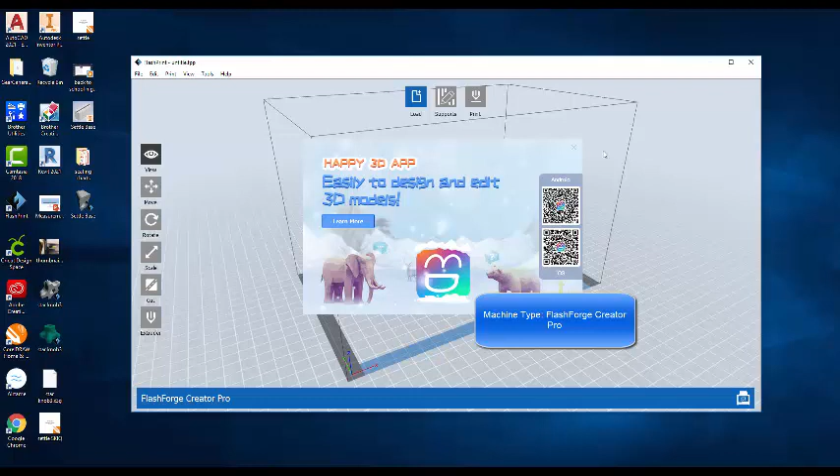Okay, now that you saved this as an STL, on your desktop you should see a program called FlashPrint. This is what runs our printers. You're gonna get a bunch of pop-up kind of ads here. You can close this. Don't download the new version. Just hit no on this. Maximize this if you want.

So I'm gonna go first to load, and I'm gonna grab the STL. This only brings in STL, so don't skip that step at the end. So I'll hit open on that. I'm going to hit yes to put it on the platform. It's probably not going to be oriented correctly when you first come in. You want this hole to be on the bottom.

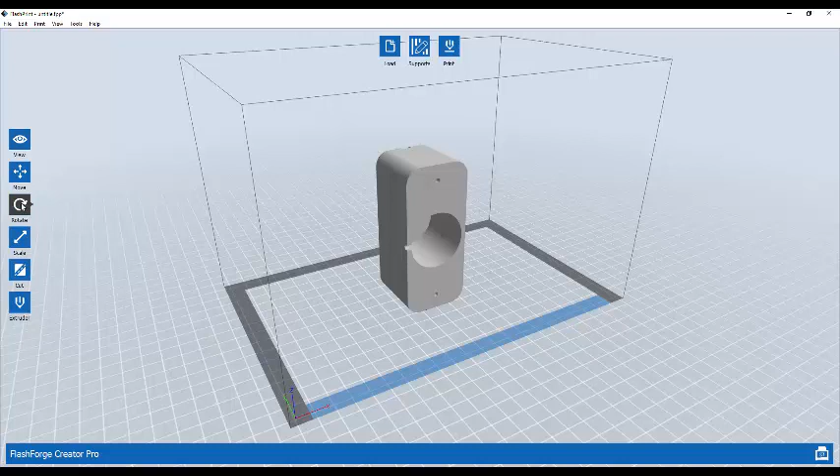So I'm going to go to the rotate tool over here, click on it twice sometimes. It says nothing selected, so I'm going to go grab my model. And then I'm going to rotate that around until I'm happy with the orientation. So right now the hole's on the bottom, but it's sitting up in the air. So I'm going to click over on the Move tab, and I'm going to say On Platform and Centered.

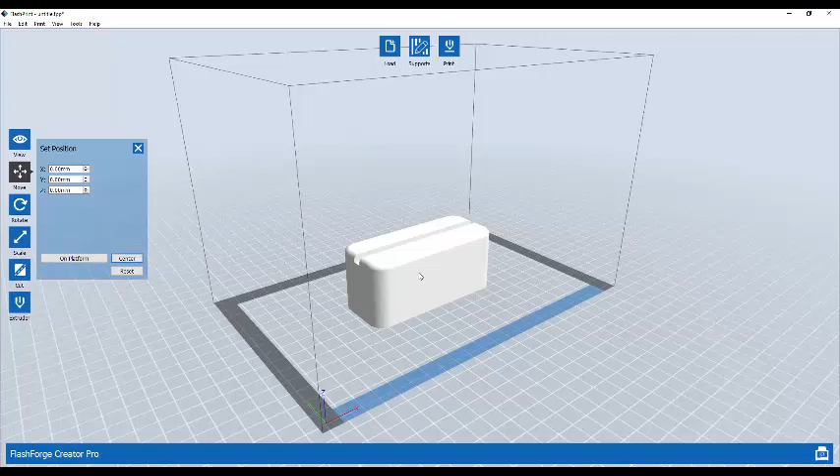If you're printing two of these together, so if you're working with a partner, you can bring in multiple models. If you want two of these, you can actually copy paste these within the model. Talk to me about that individually.

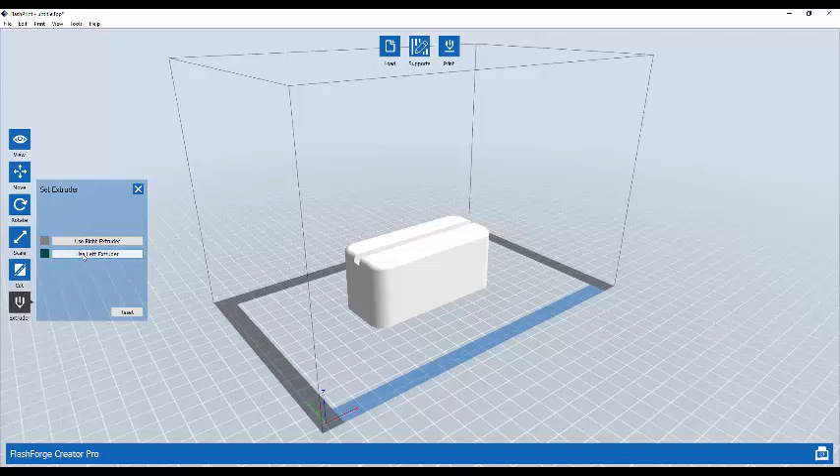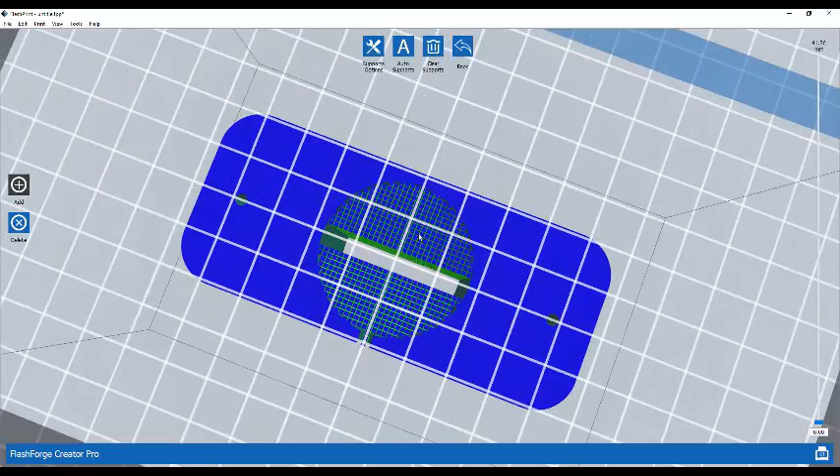From here I need some supports, so I'm going to go over to supports, and I'm going to go to support options. Tree-like is the default. You're going to select linear, hit OK, and then you're going to do auto supports. Auto supports is going to add in supports underneath so that it does not fall apart when it tries to print on top of the hole. Notice there are no supports inside of the small holes because we used the 60-degree point, and it can support itself through that. Now I'm going to hit back.

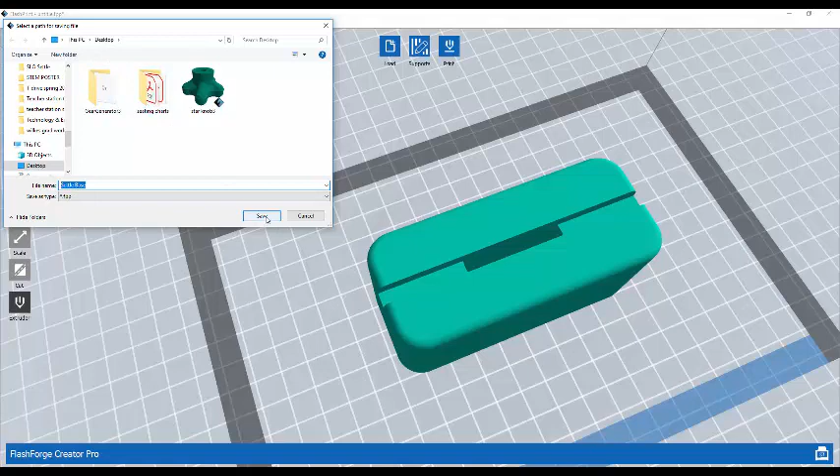It's going to say save supports. I'm going to hit yes. It wants to make a FlashPrint file, an FPP, and that's going to go the same place your STL is saved. Mine's on my desktop, so I'm going to start to clutter up my desktop, but for this activity I'm going to do that. You should probably be saving in OneDrive. And this is ready to print at this point, so everything looks good.

I'm going to go into my print menu, and there's not a lot here to do, but make sure you have all this stuff selected. I am printing with left extruder, so this is probably going to say auto match when you first come in. Just say supports are going to be left extruder, and raft might say disabled when you first come in. You want a raft, so you're going to do left extruder so everything's the same color.

Under more options, you're going to set your layer height to 0.2 and first layer height to 0.3. Those are different. I think they're 0.18 and 0.27, so bump those up. For shells, you're going to want to bump all of your perimeter shells and top and bottoms to 5. That's going to give you a nice, thick, sturdy print when you're done. So 5 for all of your shells. For fill density, we're going to just do 15% hexagonal, so it's going to give you kind of a honeycomb shape on the inside.

For speed, I'm going to do 60 and 80. So 60 for print speed, travel speed, I'm going to drop that down to 80. That seems to work nice. For temperature, your extruder temp, whether you're using left or right, is going to be 240. If you see both extruders in here, then you must have something selected at that point. You might have two models in, or you told it to do the raft in a different color.

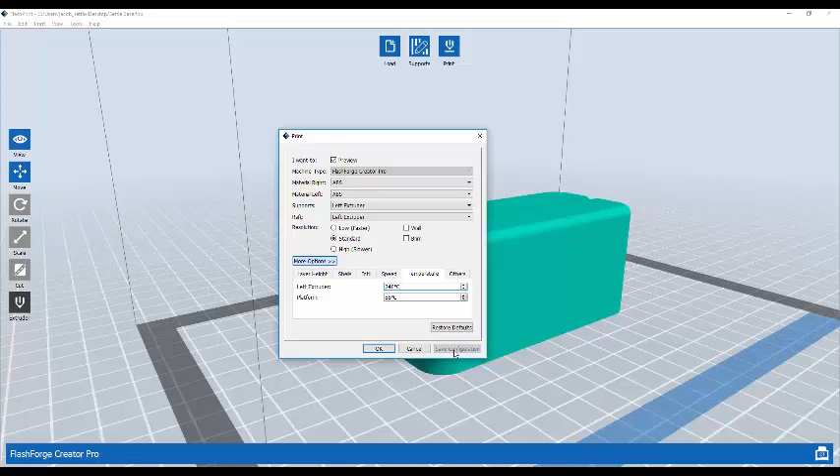So my left extruder is going to be set to 240 degrees Celsius, and my platform is set to 85. You're going to want to hit Save Configuration here so you don't have to do this the next time you 3D print. So I'm going to hit Save Config, and then I'm going to hit OK on that. It's going to tell me, all right, settle base, it's going to be a .x3g, and I forgot to tell you to change the machine type. So let me show you that.

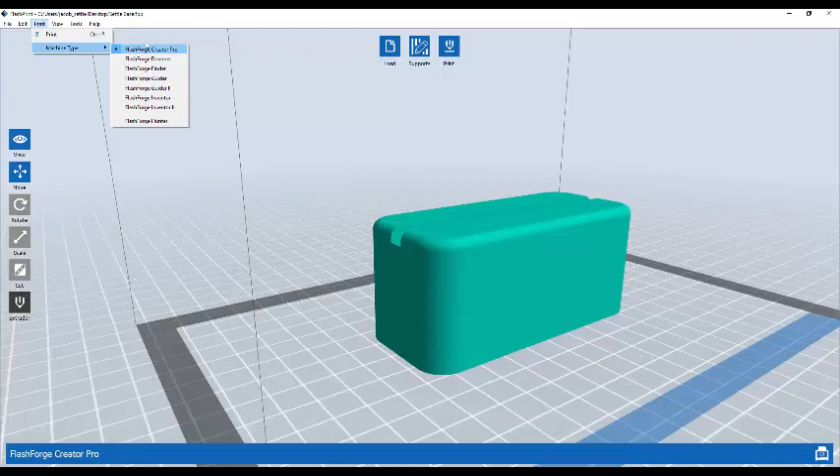Since I've already used this, under Print, Machine Type, you want to make sure you're Creator Pro. You probably are going to be asked that when you first open the program. But if you haven't at this point, you want to make sure that's Creator Pro. So I'll go back into Print, and it should have held all this stuff. If you don't have that Creator Pro selected, when you hit OK here, it won't be a .x3g. It's going to be something else. So I'm just going to put that on my desktop and hit Save.

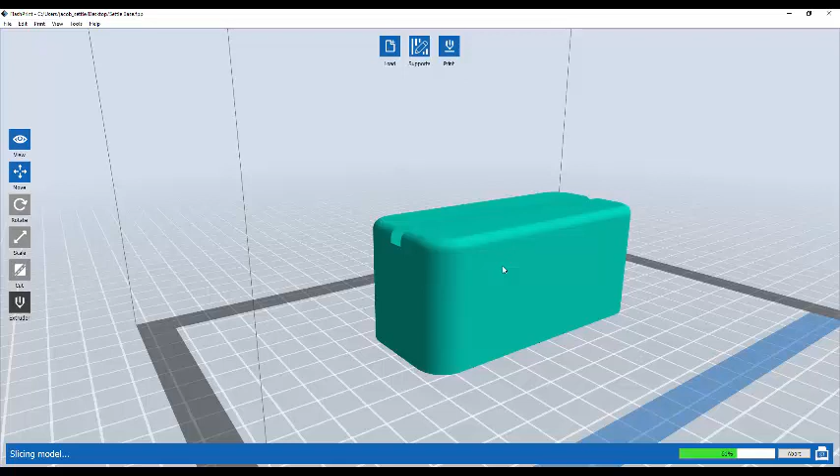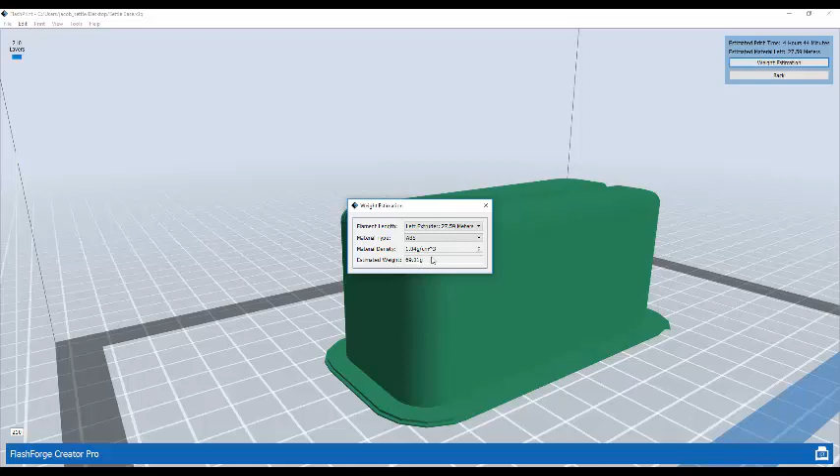So it's going to go through processing what this is going to look like. It's going to add our raft in there and then calculate our time and layer height. Okay, so this is going to take 4 hours and 44 minutes, and it's going to use 27.59 meters of material, which is pretty cool. If we go in here and we tell it we have ABS, we can take a look at this. It's going to be approximately 69 grams, and it's about 2 cents per gram, so $1.38, $1.40 to print this, so really not bad.

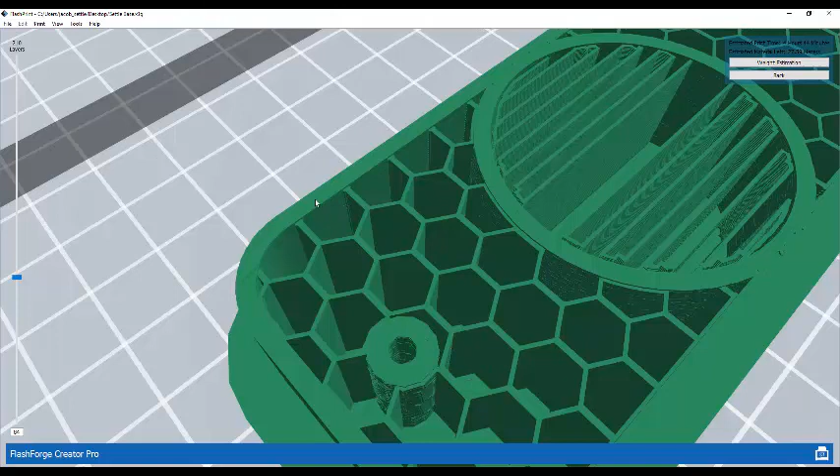You can take a look at your layer heights by grabbing that blue slider. So that honeycomb thing I talked about earlier, if you slide down through here, you'll see that the inside is not solid. You have 5 perimeter layers, and then if you look down here, this is why it's important we have the holes programmed. So we actually have material around the holes. If we just tried to screw into this, you'd only be screwing through the wall, and then you'd be hitting the honeycomb.

And then as we get down towards the bottom, here's the very first layers of your part, and then this is the raft. So this is what bonds it down and flattens the base out, and then it's starting to build your part. This little file, this settle base .x3g, I have got to put that on a memory card. I have an SD card in here already, so if I go to my File Explorer and I scroll down here, there's my SD card with some parts on it. All I have to do is take this settle base.x3g, pop that on the SD card, and then that's going to go up in the 3D printer.